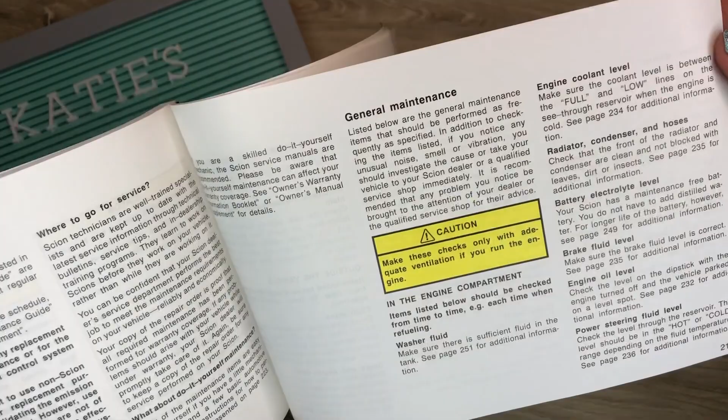Along with that maintenance schedule, some of these manuals will also have a vehicle maintenance and care section. This will give you an idea of what engine coolant is, how to tell if it's okay, things like that. So if you want more detail than just your maintenance schedule, look for your actual maintenance section inside your owner's manual. This is also how to check your fluids and what kinds to use.

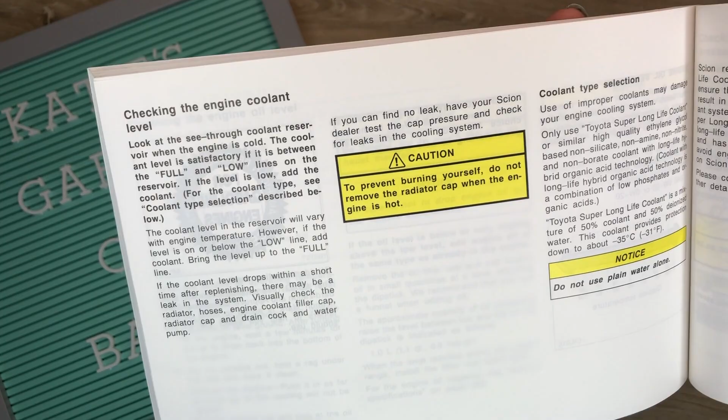I'll go back to the coolant level, for example. This says make sure the coolant level is between full and low, see page 234 for additional information. So I want to know exactly what kind of coolant to use, I'm going to flip to 234, and it says here's additional information: checking the engine coolant level, coolant type selection. It's important to understand what you need to put in your car, and sometimes the parts guys make a mistake, so make sure you're getting exactly what you need.

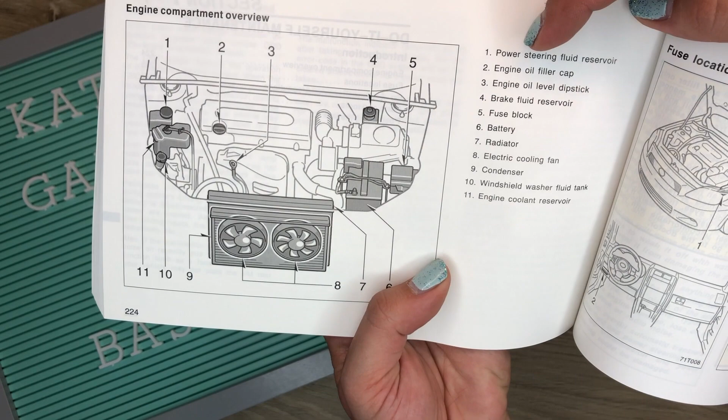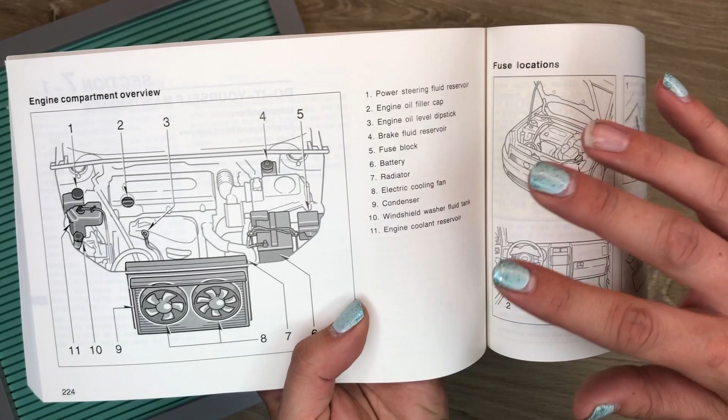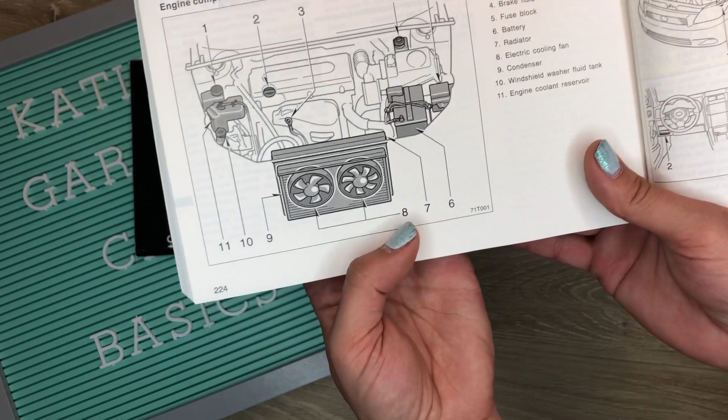Here is kind of an overview of the engine compartment of my car. It's showing me where my power steering fluid reservoir is, where the oil filler cap is, where the dipstick is to check the oil, the fuse block, the battery, radiator, etc. So anything they're telling you that you could potentially do for maintenance, your owner's manual will give you an overview and tell you what the parts are, because honestly these days cars are covered in so many plastics and things look so similar. This is a really easy way to say okay, this goes to the brakes, this goes to the power steering, this goes to my windshield washer fluid.

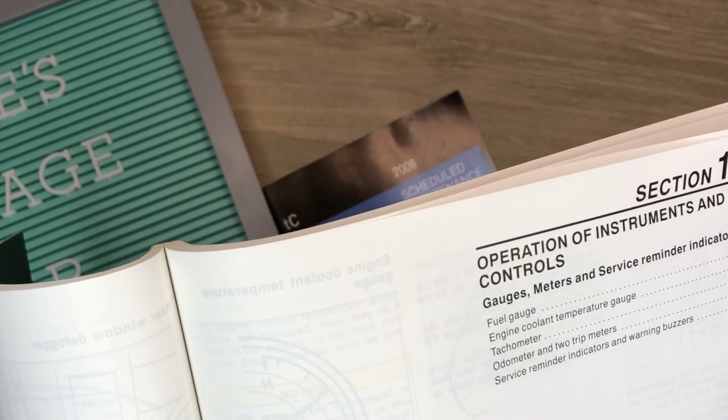All right, so I want to know what the heck is flashing on my dash right now. So I'm going to go to gauges, meters, and service reminder indicators on page 101. Okay, now I got to that page, I'm seeing service reminder indicators and warning buzzers. This is what I'm going to want to look at if I'm like, oh my gosh, what's this orange light, what does it mean, do I need to go to the mechanic? Calm down, we got this, let's see what it means. So page 105 will literally show you every single indicator that shows up.

So I'm not going to go over every single one of these, but every indicator light will have a description to the right to tell you what to do. It's really simple, it doesn't have to be scary, and it just helps you understand what's going on in your car.

And there you have it, that's how you use your owner's manual. And that's why it's so important for you to either have one or be able to find the information online.